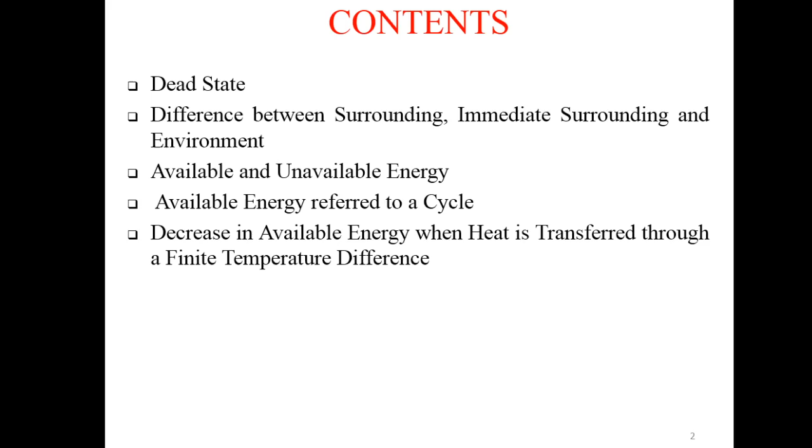In this video, I will discuss available energy and unavailable energy. Contents are dead state, difference between surrounding, immediate surrounding and environment, available and unavailable energy, available energy referred to a cycle, and decrease in available energy when heat is transferred through a finite temperature difference.

First is dead state. A system is said to be in the dead state when it is in thermodynamic equilibrium with the environment it is in, as shown in figure. At the dead state, the system is at the temperature and pressure of its environment, that is, in thermal and mechanical equilibrium. You can see in the figure we have environment temperature equal to 25 degrees Celsius and pressure equal

to 101 kilopascal. In this vessel we have air. The temperature of the air is 25 degrees Celsius and pressure is 101 kilopascal. So our first condition is that the system is at the temperature and pressure of its environment. You can see the temperature and pressure of the air is the same as that of the environment.

The system has no kinetic or potential energy relative to the environment, that is, zero velocity and zero elevation above a reference level. You can see for this system the velocity is equal to 0 and elevation is also equal to 0. So we can say that this system is at the dead state. The system does not react with the environment, that is, it is chemically inert. There are no unbalanced magnetic, electrical and surface tension effects between the system and its surroundings.

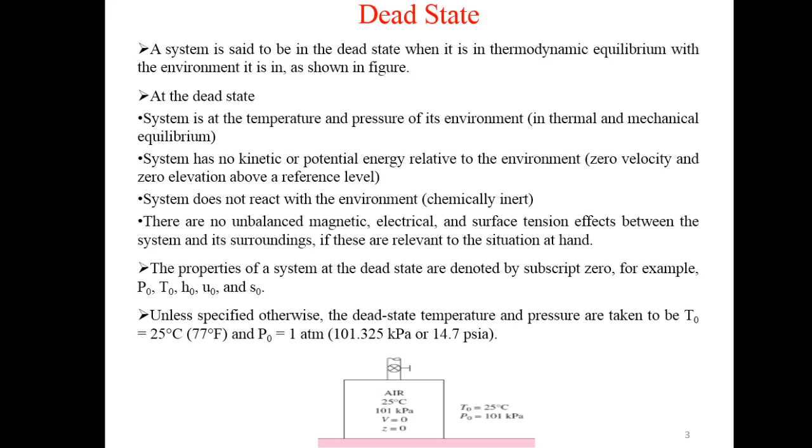Next is the difference between surrounding, immediate surrounding and environment. Surroundings are everything outside the system boundaries. You can see in the figure we have a hot potato. Everything outside this hot potato, that is our system, is known as surrounding. Immediate surrounding refers to the portion of the surrounding that is affected by the process. Again, in the figure we have a hot potato which is our system. The temperature of this hot potato is 70 degrees Celsius and the temperature of the environment is 25 degrees Celsius.

We know that everything flows from higher to lower, so there will be heat transfer from 70 degrees Celsius to 25 degrees Celsius. So in the portion immediate to this hot potato, there will be a change in temperature from 70 to 25 degrees Celsius, and this portion is known as immediate surrounding. Environment refers to the region beyond the immediate surrounding whose properties are not affected by the process at any point. When this temperature comes to 25 degrees Celsius, the portion outside this dotted line will be known as environment. So immediate surroundings and environment make up our surrounding.

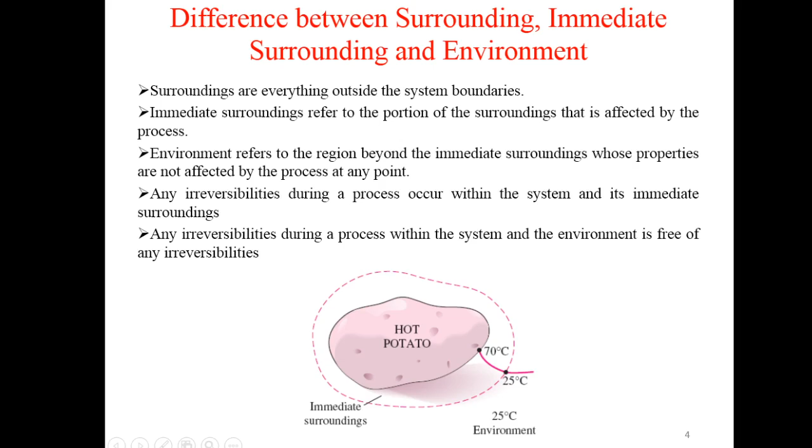Next is available and unavailable energy. The complete conversion of low grade energy like heat or thermal energy, heat derived from combustion of fuel, etc., into high grade energy like electric energy, mechanical energy, wind, water, and tidal power, etc., is impossible by virtue of the second law of thermodynamics. The part of energy which is available for conversion is referred to as available energy, while the part which according to the second law must be rejected is known as unavailable energy.

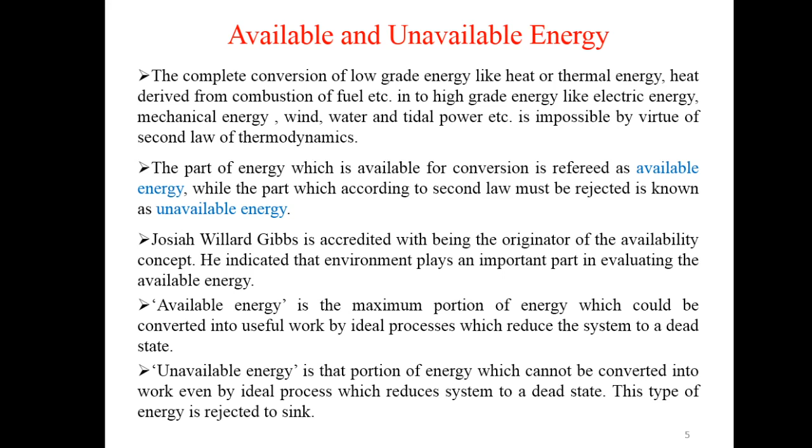J.W. Gibbs is credited with being the originator of the availability concept. He indicated that the environment plays an important part in evaluating the available energy. Available energy is the maximum portion of energy which could be converted into useful work by ideal processes which reduce the system to a dead state. Unavailable energy is that portion of energy which cannot be converted into work even by ideal processes which reduce the system to a dead state. This type of energy is rejected to the sink.

Available energy referred to a cycle. The maximum work output obtainable from a certain heat input in a cyclic heat engine is called the available energy, that is AE, or available part of the energy supplied.

The minimum energy that has to be rejected to the sink by the second law is called unavailable energy, that is UE, or the unavailable part of the energy supplied. Therefore, heat input, say Q1, will be equal to available energy plus unavailable energy, or we can say

Wmax, that is maximum work output obtainable, will be equal to available energy, equal to heat input Q1 minus unavailable energy, for given values of the source temperature T1 and sink temperature T2 as shown in figure.

So we have a heat engine which is operated between source temperature T1 and sink temperature T2, and we are supplying Q1 amount of heat to this heat engine from the source at temperature T1, and because of this we are getting W amount of work and rejecting Q2' amount of heat to the sink.

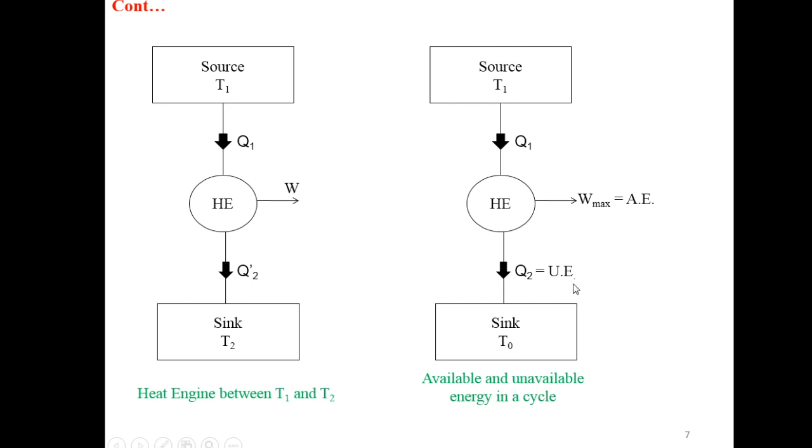Taking an elementary cycle, if delta Q1 is the heat received by the engine reversibly at temperature T1, then the value of maximum work obtainable in differential form will be equal to T1 minus T naught divided by T1 multiplied by differential of Q1. You can see here we have already written this formula. From here we have written this. So if you open this, you will get differential heat input minus sink temperature divided by source temperature multiplied by differential heat input.

For a heat engine receiving heat for the whole process LM, rejecting heat at sink temperature T naught, we will do the integration of the above equation. Then integration of differential of W max from L to M equals integration of differential Q1 from L to M minus integration of T naught by T1 differential of Q1 from L to M.

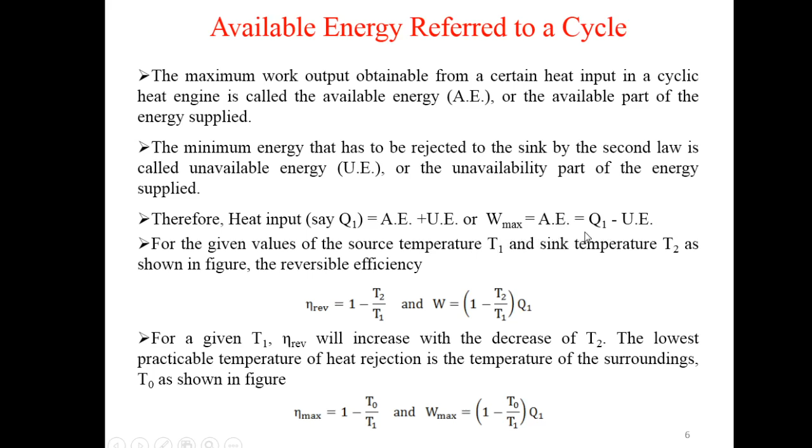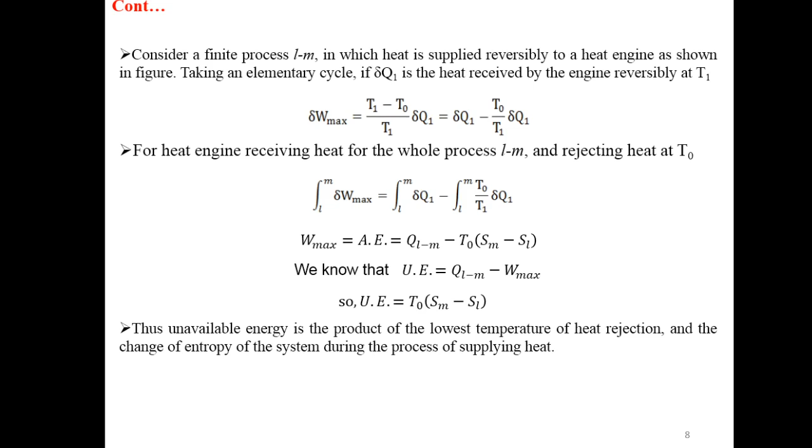We know that unavailable energy is equal to heat input minus W max. You can see we have already defined this here. So unavailable energy will be equal to Q1 minus W max. So we have written down here QLM minus W max. So if you compare both these equations, we get unavailable energy equal to T naught into change in entropy Sm minus Sl. Thus unavailable energy is the product of the lowest temperature of heat rejection and change of entropy of the system during the process of supplying heat.

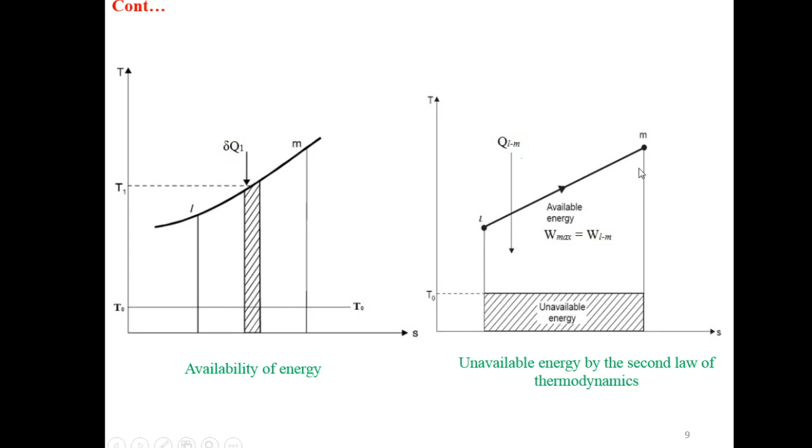So you can see in this temperature-entropy diagram, this is the process LM and we are supplying the heat QLM, then this portion, this height into width, where width will be Sm minus Sl. This is Sm, this is Sl. So width Sm minus Sl into T naught will be equal to unavailable energy. We have already defined this, and this portion will be equal to available energy, that is W max equal to WLM.

Next is decrease in available energy when heat is transferred through a finite temperature difference.

Consider a reversible heat engine operating between temperature T1 and T naught as shown in figure. So this is the TS diagram. We are having a reversible heat engine operating between temperature T1 and T naught, and we are supplying Q1 amount of heat.

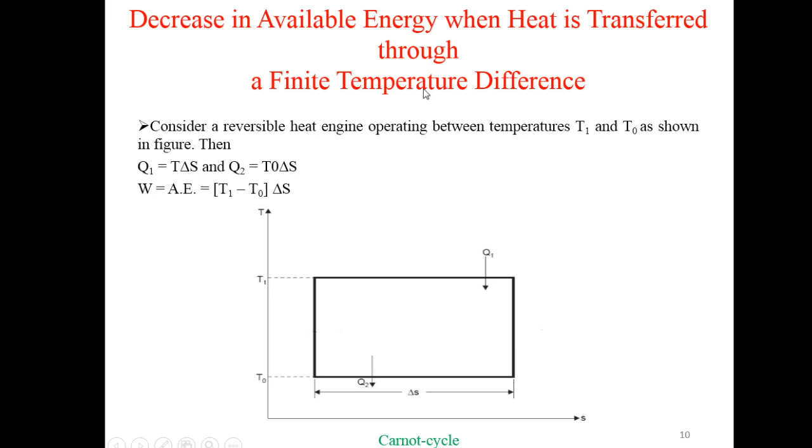Thus the decrease in available energy is the product of the lowest feasible temperature of heat rejection and the additional entropy change in the system while receiving heat irreversibly compared to the case of reversible heat engine from the same source. The greater is the temperature difference T1 minus T1 dash, the greater is the heat rejection Q2 dash, and the greater will be the unavailable part of the energy supplied.

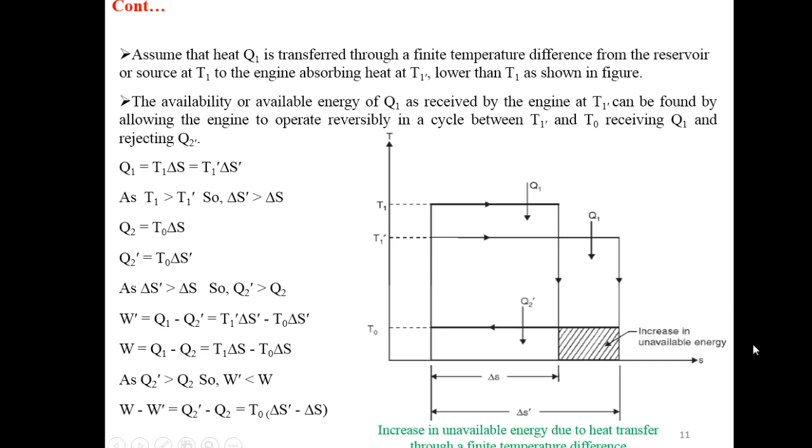Energy is said to be degraded each time it flows through a finite temperature difference. So we have proved this. Whenever there is a finite temperature difference, there will be increase in unavailable energy. So we can say energy is degraded each time it flows through a finite temperature difference. That is why the second law of thermodynamics is sometimes called the law of degradation of energy, and energy is said to run downhill.